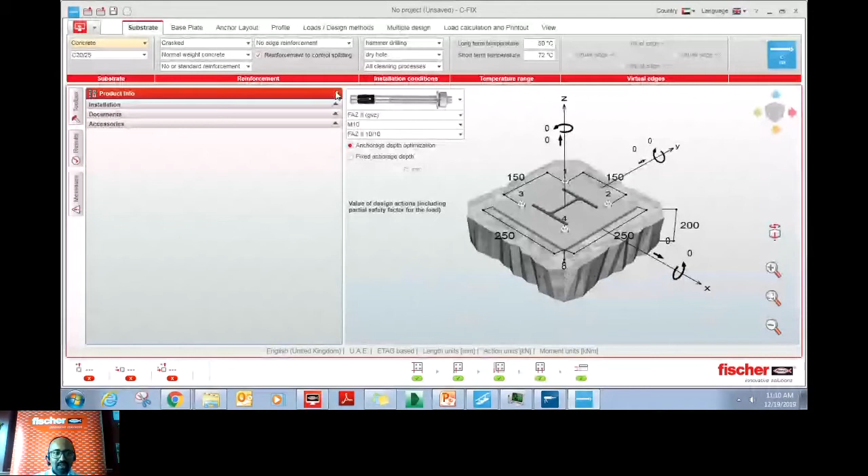The software as such is made so that you can finish your designs quickly, fast, and with less confusion. So the trick is you start from left, you end at the right side. You can see different tabs from the left side, top, which is substrate. The second tab is base plate, third is anchor layout, profile, loads, multiple design, load calculation, and printout.

So we start with substrate, fill all the information as you go, and end up at load calculation and printout where you would get your report. So let's now dive a little deep into each of these modules, each of these tabs.

The first thing, substrate, is the most important thing because this is where you want the anchor to be installed. Is it concrete? If it is concrete, is it cracked or non-cracked? Or is it masonry? If it is masonry, is it hollow block, solid block, AAC block? What is it? This defines where you are going to make your drill hole and fix your anchors. Let's say you have fixing in concrete.

If it is concrete, as we all know, there could be two conditions, cracked or non-cracked. Let me be a very conservative man, I would select cracked concrete. Then you have to define what is the compressive strength of concrete, or what is the grade of concrete.

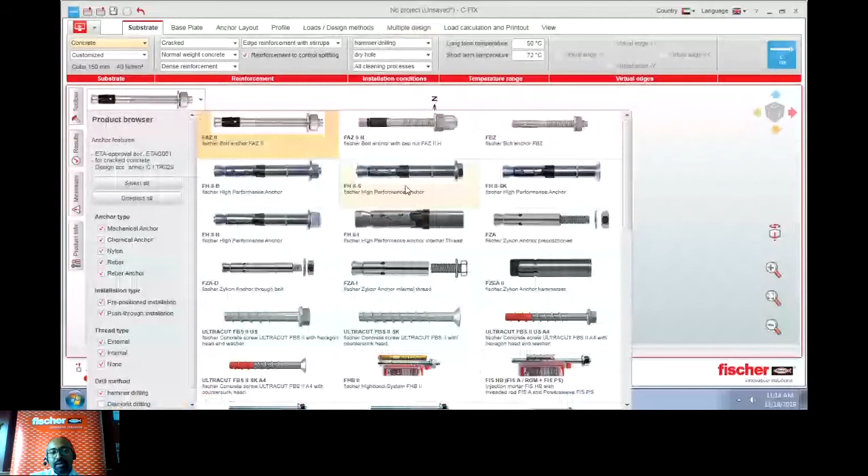The next thing, also an interesting topic, is you can select a dry hole, water saturated hole, or standing water in hole. Dry hole is when the hole is 100% dry. Water saturated concrete is when the concrete is wet, and standing water in the hole is where water is inside the hole itself.

The next option is to define the temperature of concrete. Always remember, this is not the ambient temperature, it is the substrate or service temperature of your concrete. In normal cases, if you have an ambient temperature of 30, the concrete tends to be hotter or warmer, so you always have to define your concrete temperature. Honestly, this does not affect mechanical or metal anchors much, but it affects chemical anchors a lot. So if you're an engineer designing chemical anchors, make sure you're using the appropriate temperature.

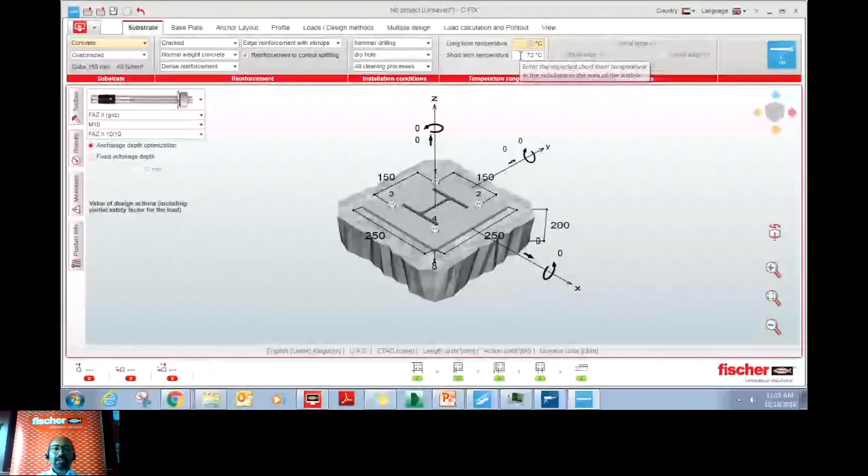To make your job easier, Fischer has selected the maximum temperature in the region, which is a long-term temperature of 50 and a short-term temperature of 72. So we have taken care of this part, but if you have higher temperatures, you'll need to consider this.

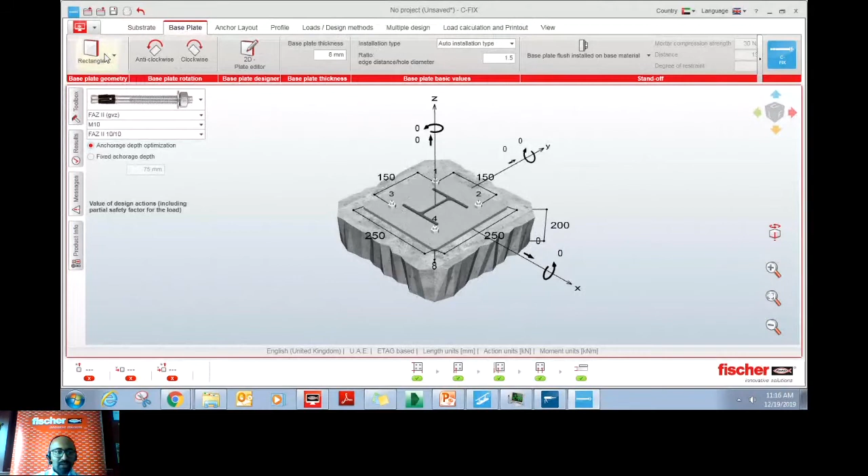Let's go to base plate. The base plate is basically the plate which you are connecting using the anchor to your concrete. For the base plate, you have the option of different shapes. You can even design a single anchor with no base plate.

You can have a circular base plate, an elliptical base plate, a triangle base plate, a rectangle base plate, which is always a common requirement, a hexagon, or a polygon. The polygon option lets you define your base plate in any abnormal shape, as you saw above. We'll come to that in a moment.

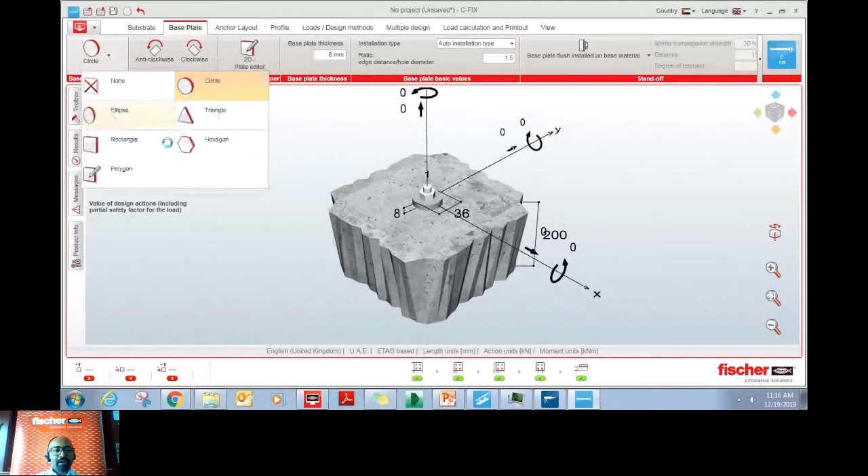Let's take, say, a rectangle base plate. Let me give it a dimension of 300 width and 400 breadth. You also have the option to rotate the base plate at 45-degree angles to match your requirement.

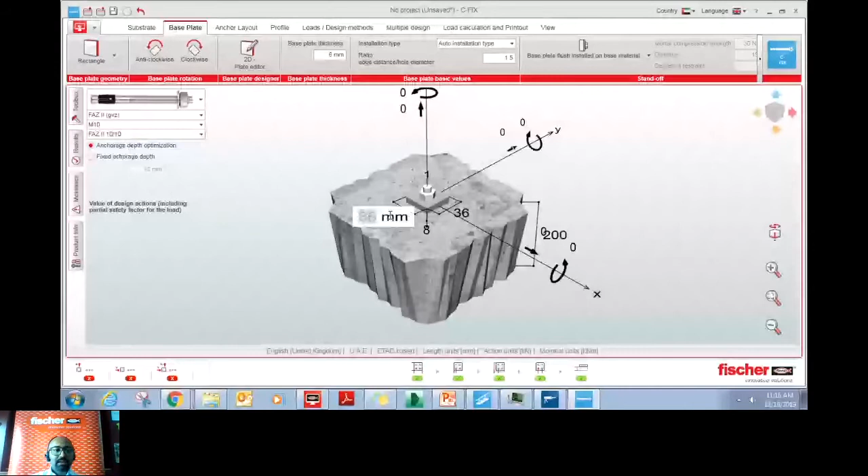Now the next portion is called the 2D plate editor. Once you click on 2D plate editor, this is the same option as the polygon we saw. This gives you the power to modify and customize the base plate to any special requirement you have. I can modify it and make it a triangle, or make it something like this, which is a very unique base plate.

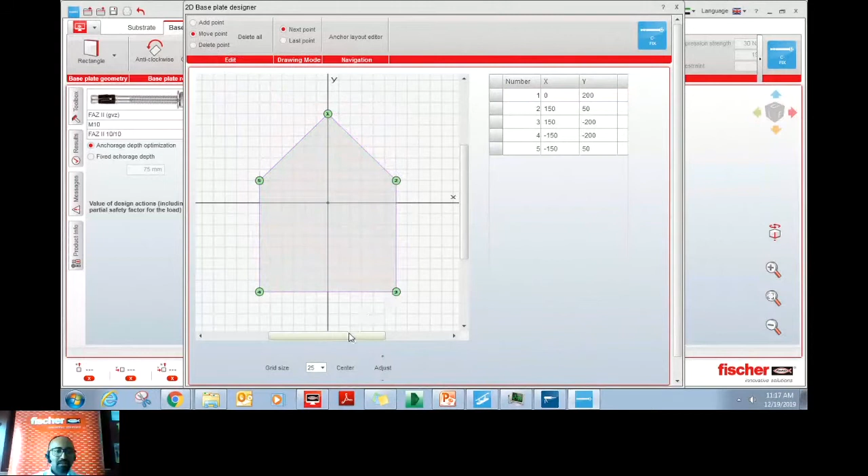This is basically like a toy. I really enjoy using this tool. You can really play with the software and design your base plate. You can make any random shape, you can be creative with this tool, and have a really flexible base plate designed according to your site requirement.

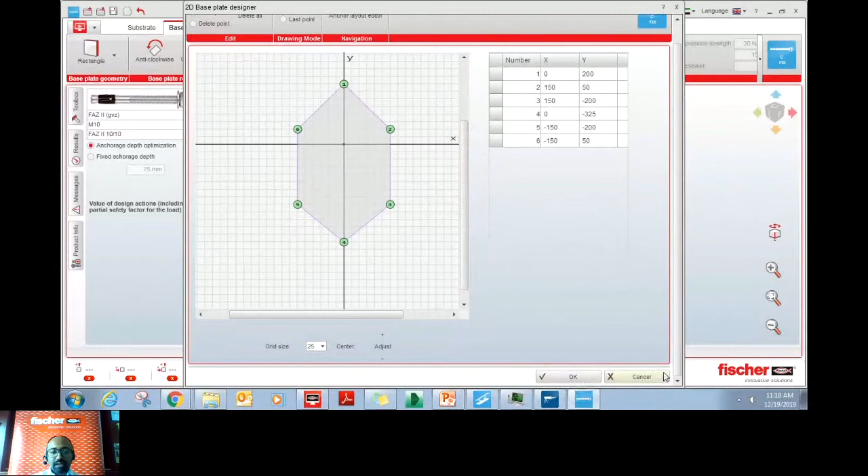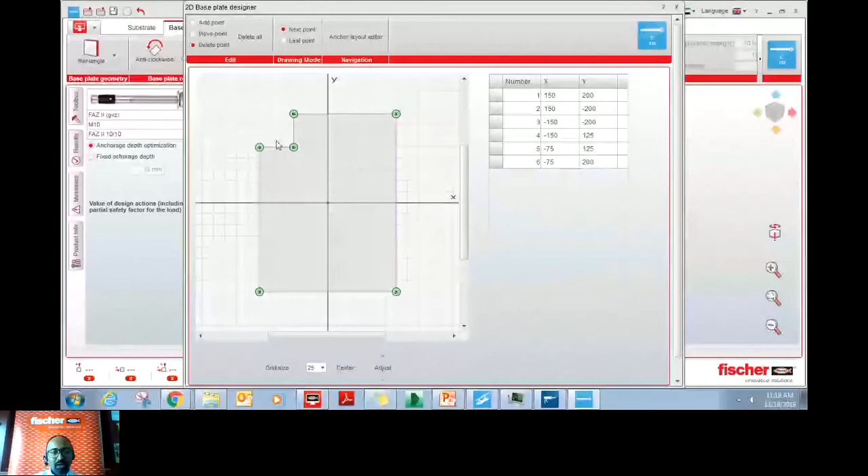In some cases, when you have a rectangle base plate and a concrete column coming at the corner, you might want to make a notch. This is a very useful tool for that too. You can create it the way you want, just like this. So if you have something clashing with your base plate and you can't have a plain rectangle base plate, you can design a notch in the software and have a more realistic base plate design.

Next is the base plate thickness, which is basically the thickness of the base plate. You have two options: either mention the thickness directly, or change it in the interface. I feel 8 mm is too little, so let me make it 10 mm. You can use either method, it's very easy.

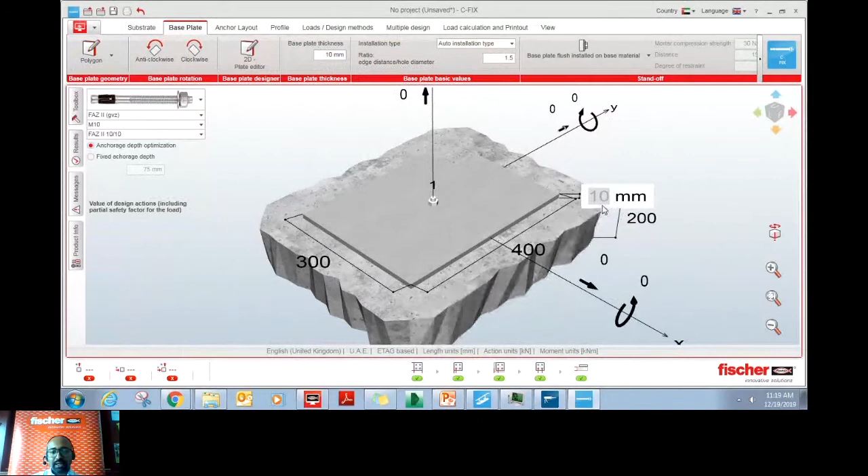Then you have an option here called auto installation, pre-installation or post-installation. To make it simple and to avoid any confusion, keep it auto installation so the software takes it as a more conservative thing.

The most important thing when you're designing a base plate is this value, called the standoff option. By default, the software assumes your base plate is connected straight to the concrete, with no gap between the plate and the concrete, which is not true in most cases.

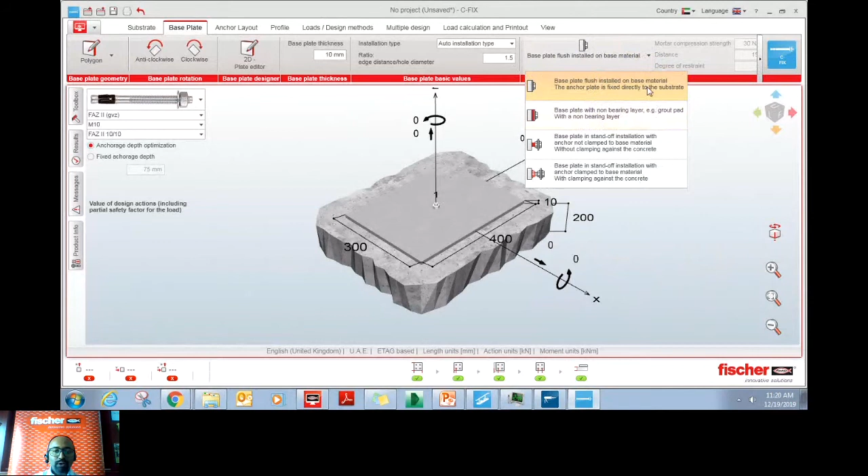So you have an option of standoff. If you have a grout, a non-shrink grout between the base plate and the concrete, you can use this option to add a layer of grout, let's say 25mm. Now, as you can see, there is a grout of 25mm between the plate and the concrete.

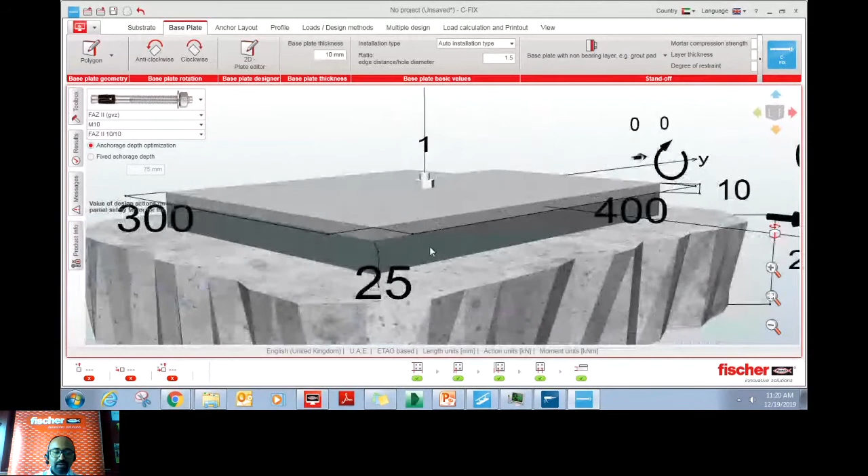This is very critical in design, and if ignored, your anchor might start bending because it is experiencing high bending moment. It makes a difference only when you have shear force. For tension, it might not affect the anchor capacity, but for shear loads, it affects a lot.

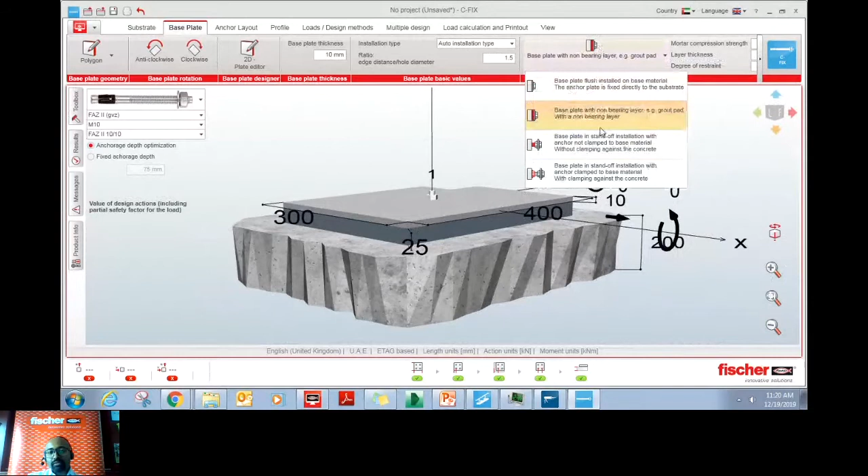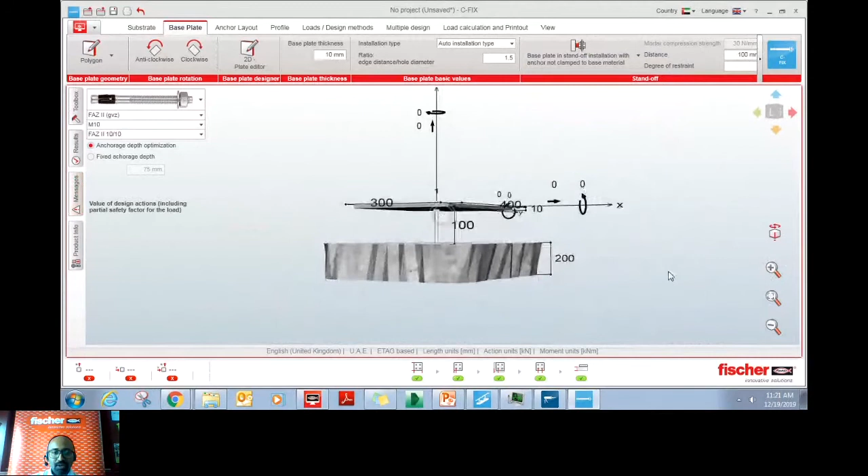In standoff, we have a few other options. For example, if you don't have a grout in between, you have an option to make a standoff like this. Let me make it a little bigger so you can have a better view. So this is a standoff with nothing in between, it is pure standoff.

As you can see in any lamp post fixed in Sheikh Zayed Road, next time when you pass Sheikh Zayed Road just have a look at the lamp post, you would see a standoff like this.

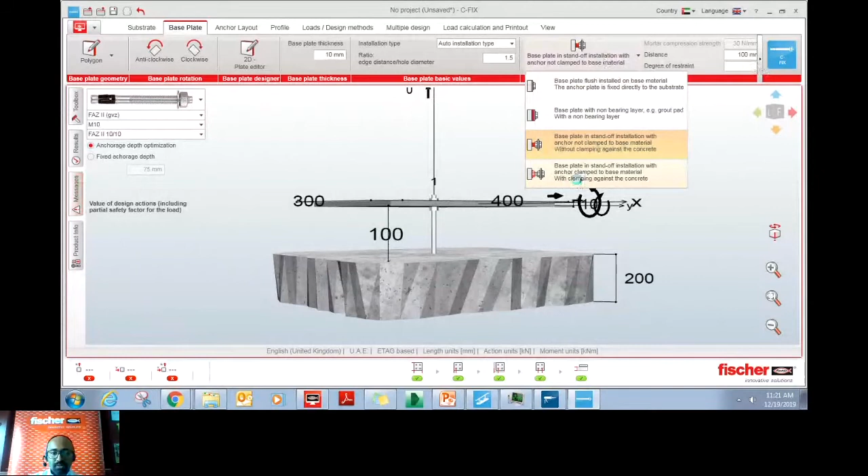Or we can have a standoff with 3 nuts, 1, 2, and 3. So you have different options - a grout layer, no standoff, or just pure air in between, with nothing filled in the gap. This is one of those options.

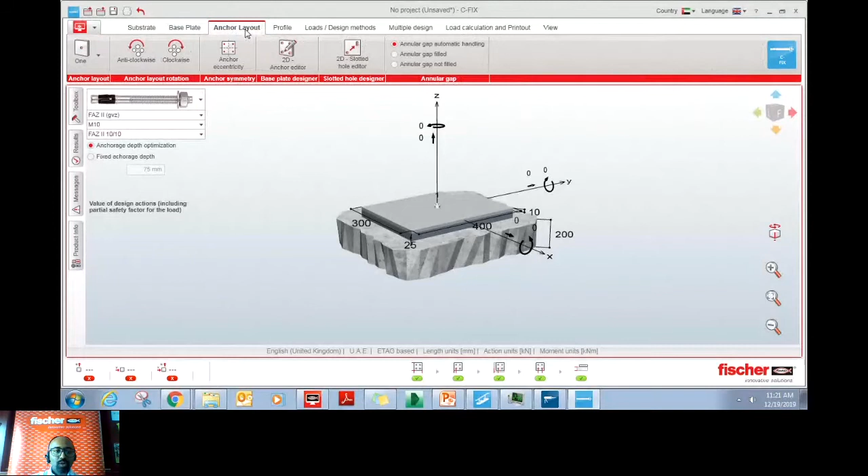And then you go to anchor layout. In anchor layout, it lets you choose the way your anchors are arranged in the base plate. First, if you go to the left side, you would see an option to select the design of anchors, the layout of anchors.

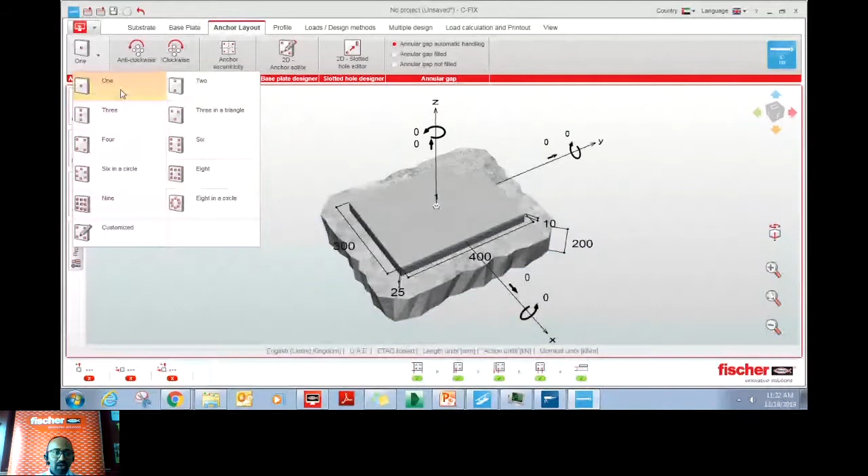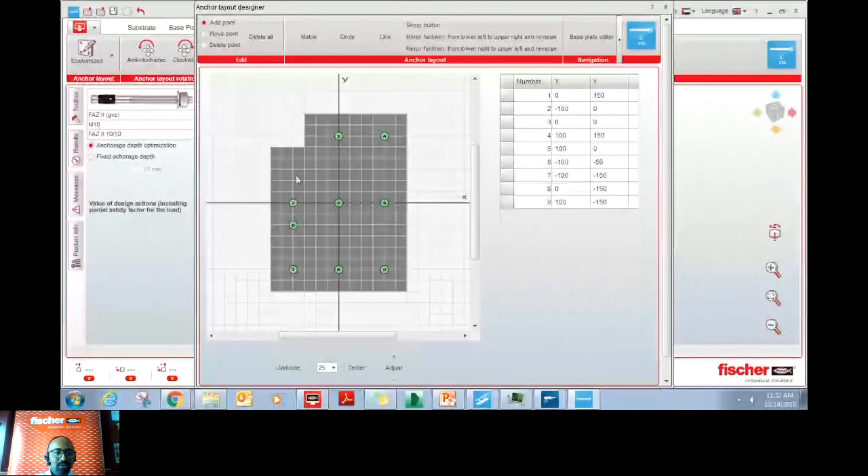You can have a minimum of 1, of course, and a maximum defined by the software of 9. Even if you have more, you have an option called customized. If you go to customize, you can add anchors in any number and any location - the software does not limit you to 9. You can go to even 10, 12, 20, up to you.

So you have a tool where you can add all these values. If you have a very complicated design with probably 12 anchors, and you've made an AutoCAD sketch, you can directly add the coordinates on this screen and it automatically gets saved.

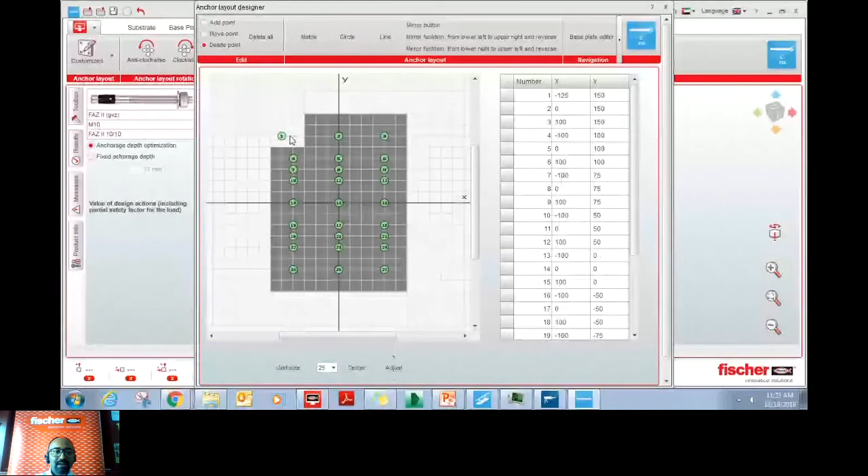Or we have an option called mirror, where to save some time, you can click the mirror button and both sides would have a duplicate. So you have to basically do only one side and then it would be duplicated to the other side. Okay, that's how it is.

To make the design a little simpler, let me go with a standard arrangement of 4 anchors with a spacing of 300. Actually, 300 would be too much - let's go with 200 by 200. Okay.

Now you have the 2D plate editor, which we already saw. There is an option called slotted hole editor. If you are designing with a base plate having slotted holes, you can definitely choose the slots.

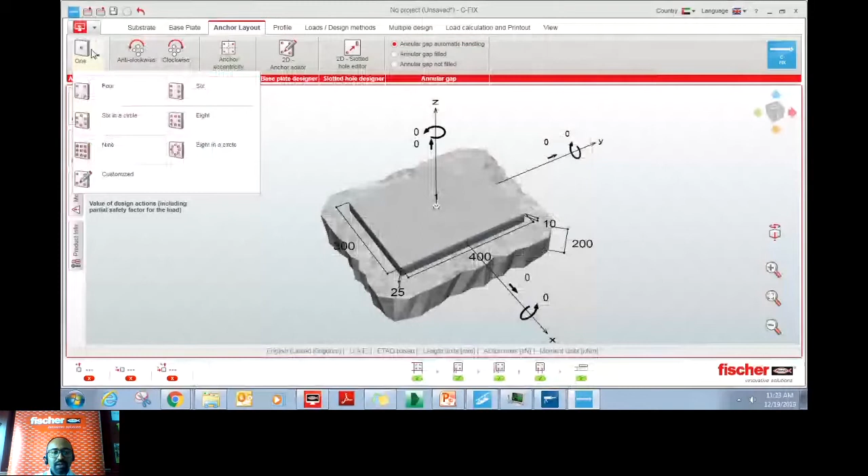You can have slots either on 2 holes or 4 holes, up to you. So you can design something like this, and the software will calculate accordingly. In the event of a slotted hole, basically the anchors at the slotted hole would be released in shear direction parallel to the slots - this is what happens.

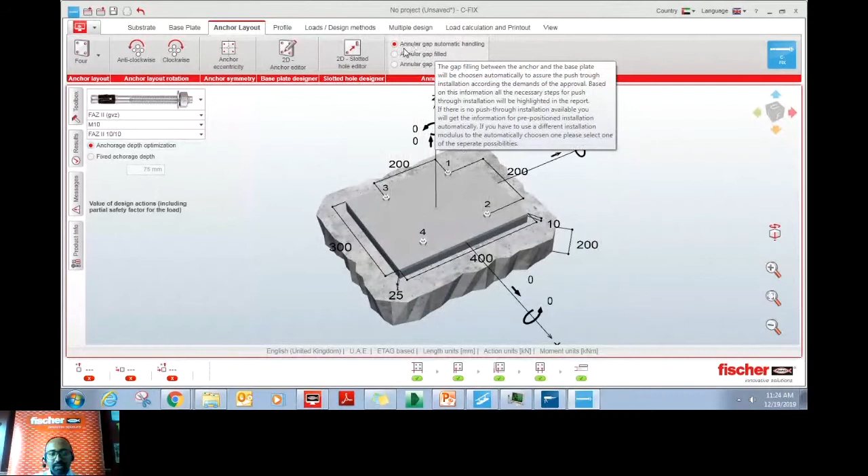Then you have an option for annular gap handling. By default, it is automatic, or you can select annular gap filled. When you select annular gap filled, if you notice the anchor, you can see an orange ring around it. Basically what it says is the gap between the anchor and the base plate should be 100% filled with a non-shrink mortar - it could be an epoxy based chemical or any non-shrink mortar available.

You can use it, but sometimes you don't prefer this method, so you can tell the software you don't want this option at all by clicking annular gap not filled - so in any circumstances, you won't have annular gap filled. But if you want the software to advise whether it's necessary or not, go for automatic handling and the software does the job for you.

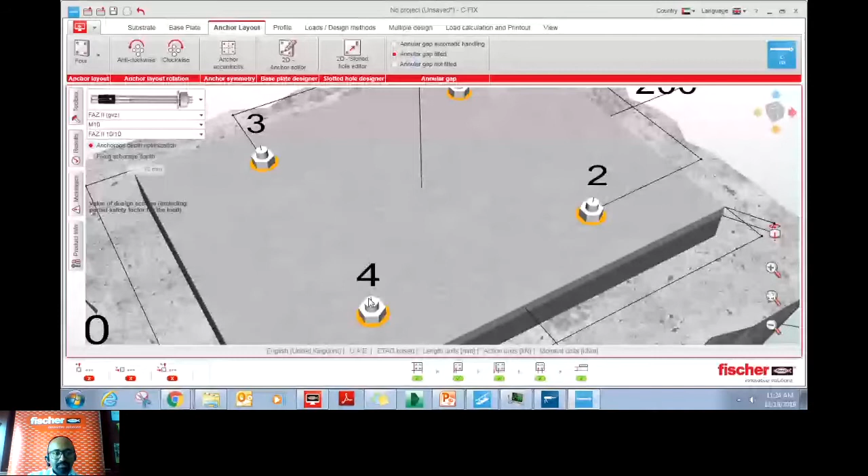Let's go to profile. Profile lets you define what is the profile which is transferring the load to the base plate. As you can see, most of the European sizes are mentioned here, like I profiles, H profiles, and so on. Even L angles, T sections, Z profiles, square, circle, most of them are available. But if you have a shape or a dimension which is not part of this, there is still an option here called customize.

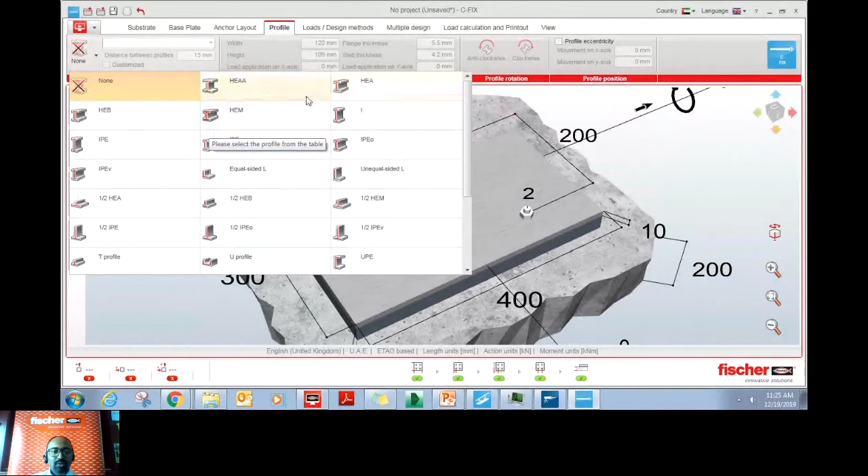Let's say in this case I want a profile which is 100 by 200. I can do that, with a flange thickness of 6 mm and a web thickness of 4 mm. Just from my mind, for an example, you can define that and the software would draw it for you. And you also have an option to rotate the profile in 45-degree angles. In any direction you can rotate it.

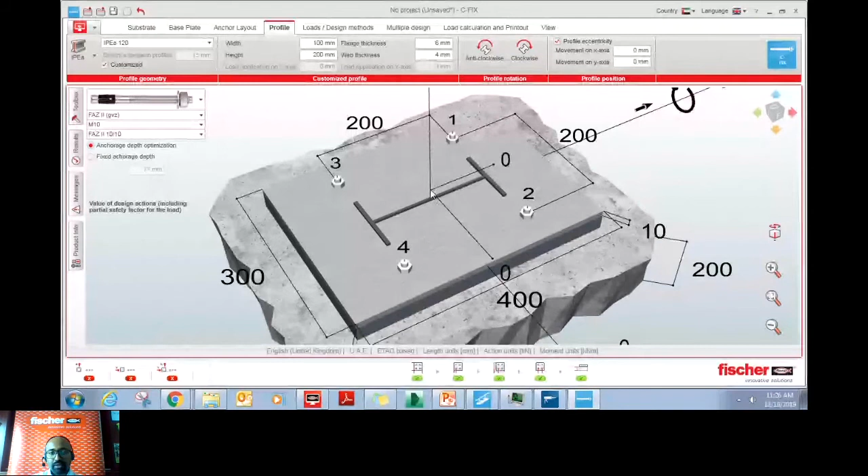Also, we have an option called profile eccentricity. If you want to move the profile away from the center of the base plate, you can do it in X or Y axis. So you can have 50 mm in X, 50 mm in Y. You would have a profile eccentricity, something like this. You also have an option in anchor layout called anchor eccentricity, wherein you can change the symmetry of the anchor. You can make it asymmetric by moving the anchor away from the axis. You can customize it and modify it to match your requirement.

So now we are at profile. The next thing is the most important thing, which is loads. In loads or design methods, the first option is to define the design method you prefer for anchor calculation. The first method is called ETAG. ETAG is the European Technical Approval Guideline, which is the oldest and the most popular code for design of anchors.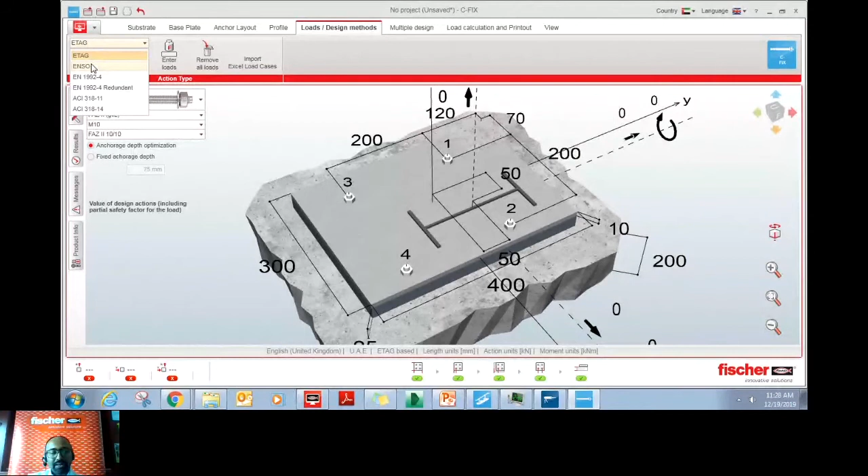The second option is called ENSO. ENSO is an engineering solution developed by Fischer based on the state-of-the-art fib Bulletin 58, which makes your anchor design even better. It takes it to the next level by designing more number of anchors, more flexibility, and so on. And then the latest code, which got released almost end of last year or beginning of this year, is Eurocode 1992 Part 4, which is also available.

And then you have a code for redundant fixings, where you are fixing non-structural applications with sharing of loads, like your pipe applications or cable trays. You also have American code ACI 318 part 11 and ACI 318 part 14 if you wish to design as per American codes. So all the options are available in the software. Let's stick to ETAG, which is the most popular code.

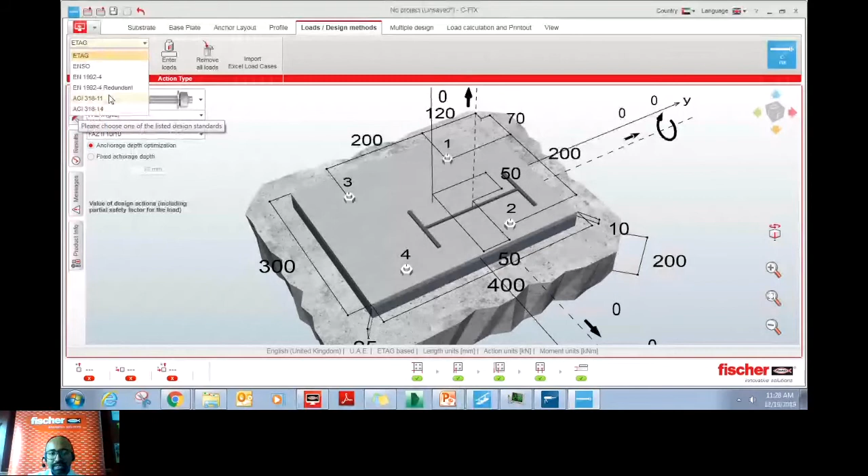And then design actions. By default, the software lets you calculate anchors with loads. Whatever load you tell it, the software assumes by default they all include a load safety factor. Let's take an example. If you want to have a tension of 10 kilonewton, which is an actual load, you multiply it with a load safety factor of 1.5 and put 15. So the software takes it as a design load. It assumes that you have included a load safety factor.

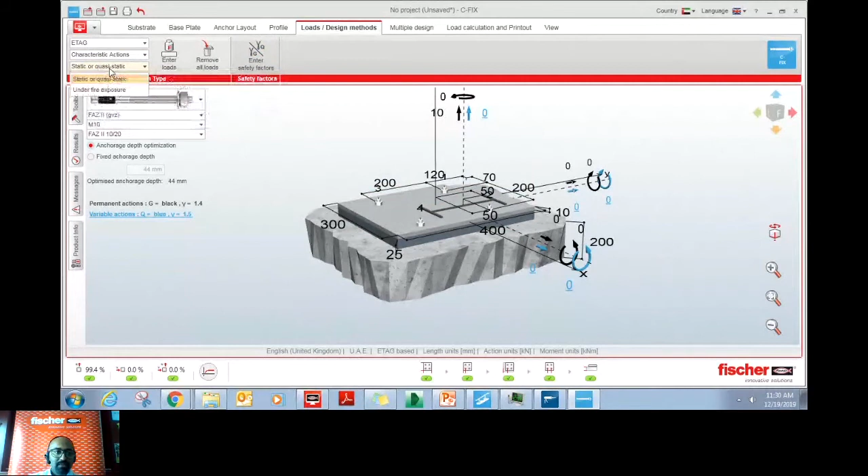But you also have an option for characteristic actions, wherein you can tell the software the real load, the working load, and you can modify the safety factor you want. For example, I want 1.4 for dead load. So the software automatically applies the safety factor, and then the job is done. Let me go back to design actions. Yes.

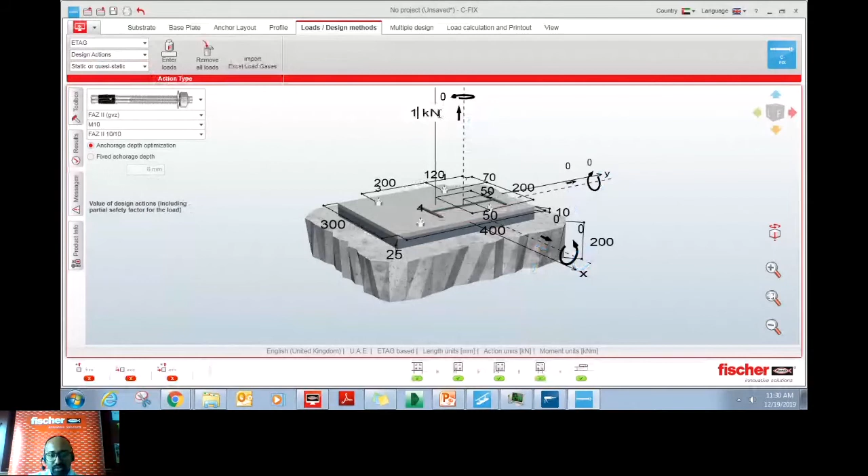Now the software is capable of doing a static design, fire design, seismic design, alternating design, or pulsating design, which is mainly dynamic loads. You can enter the loads manually, directly on the diagram, or you have an option to add loads one by one, or you can import Excel load cases. If you have a load case, you can directly import it using this tool.

So there is an Excel file. We can share the template with you also. You click on this, select your Excel file with the load format, and all your loads, you can have multiple load combinations, and all of it would be loaded directly. Now to proceed, let me check. Yeah,

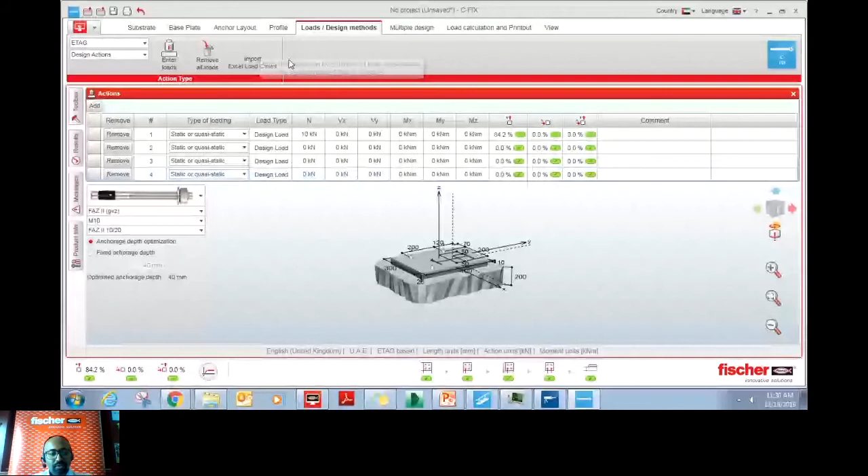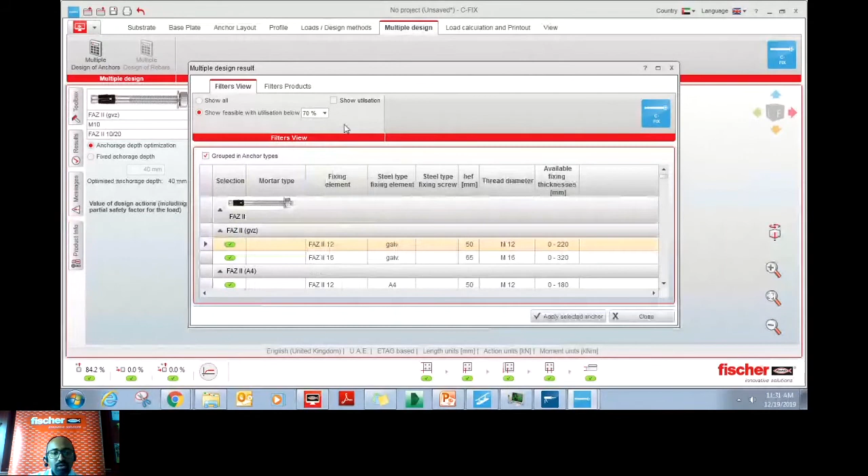multiple design. Multiple design is a tool if you want to see all the possible anchors working for the given criteria. So you can see these are the anchors passing the criteria, and you have a filter here also. If you want to see all anchors below 70% utilization, you can also do that here. You can filter the utilization and the anchors less than 70% would appear.

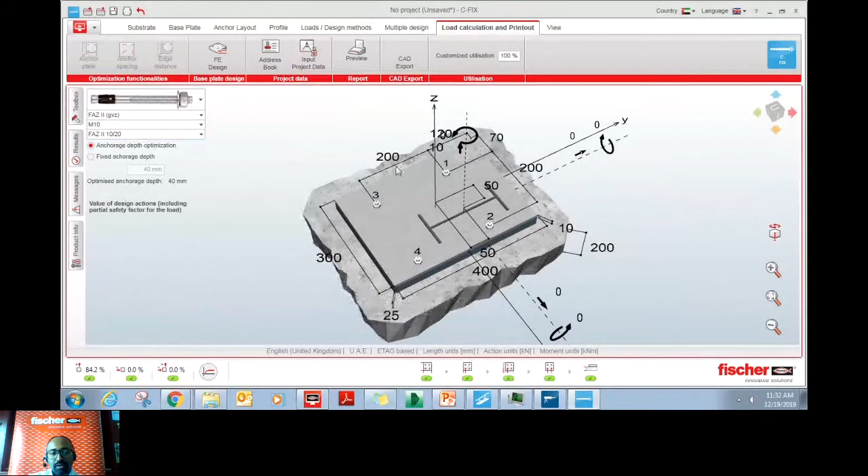And then the last option is load calculation and printout. Now, I forgot to mention a point. If you have edges, for example, this plate is connected on a concrete column 500 by 500. So your concrete thickness is 500 and you would have an edge distance of 150 both sides, because the total should be 500 on this side as well. Okay, so now you are fixing on a concrete column 500 thick and your total dimension is 500. So this is how you define the edge.

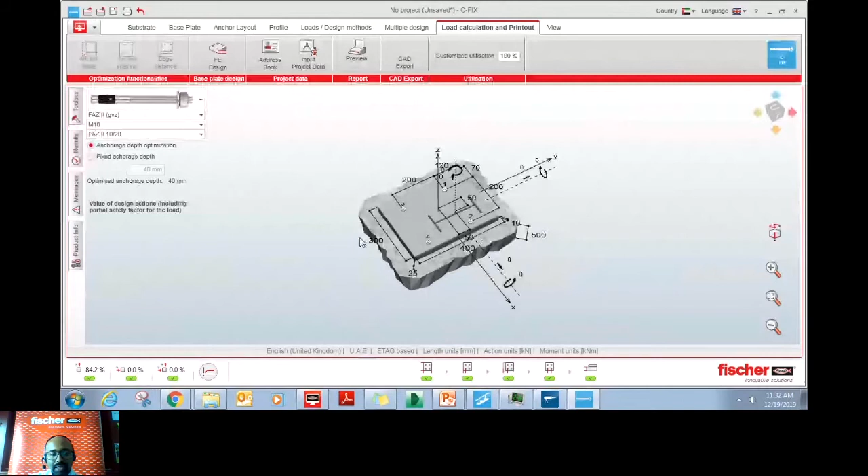And then you go here. There is a tool called FE design. It is finite element design. So the software is built in with a finite element module where you can choose your plate raw material, the steel grade. Let's take it as S275. You can tell the software to calculate the minimum thickness and it tells you, see, you require only 8 for your loads and your profile. So click on that, you would have 8 directly part of the software. You also have options to enter your address, your project details, etc.

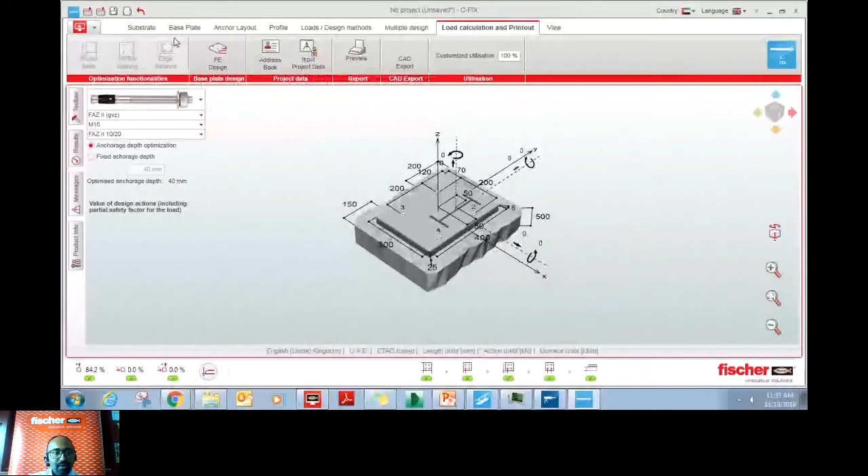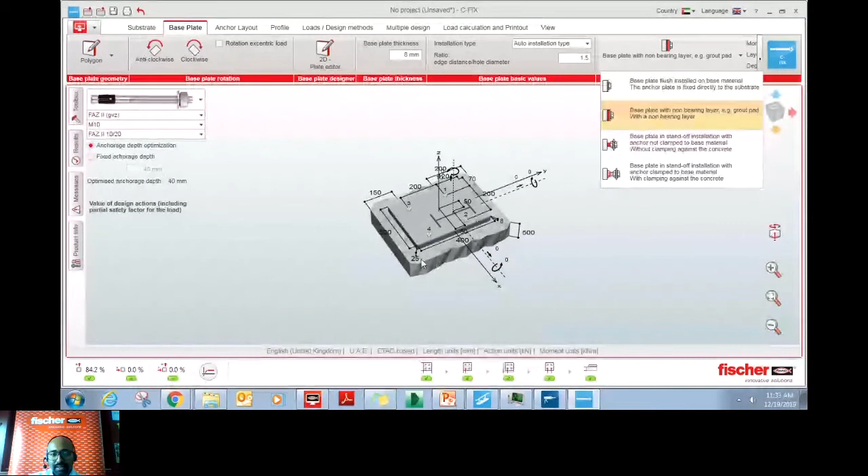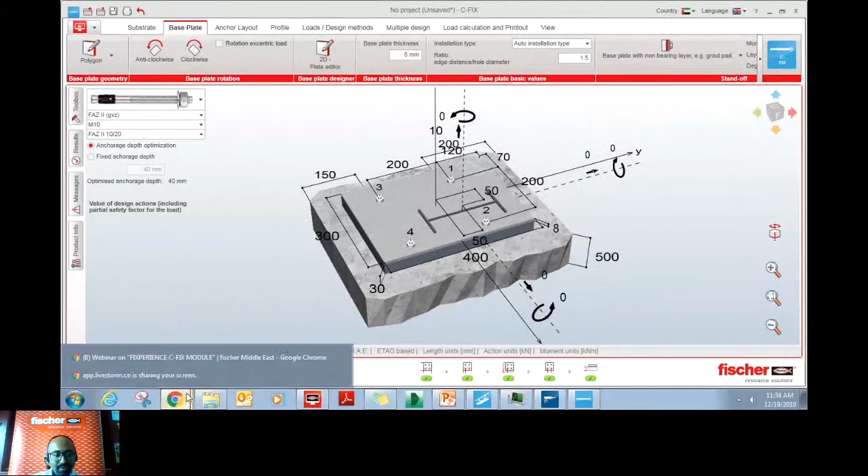Now, let me ask you a question. We discussed here that we have an option where you can define a standoff fixing. Let's say we have a standoff fixing of 30. Okay, why do you think it is very important to define this in the software rather than leaving it in this option? What would happen if you design the calculation using this option, but inside you have this option? What do you think would go wrong? Any idea? What might happen if you don't consider standoff installation of anchors while you design?

Okay, I can give you two options. Okay, you are a little correct, Mr. Amir, but something more specific I'm looking for. You have two options. It'll affect anchor length, it will differ, of course, but also, thank you, Mr. Andrew, for participating. But also, what do you think from a structural point of view? What might happen in the anchor capacity?

Okay, yes, both of you are almost correct, Hudson and Nasruddin. It'll affect the moment capacity of the steel of the anchor. Irene is also correct. Amir is also correct. You would have reduced capacity, but it is only reduced capacity in shear because you have more bending moment on the steel. So the lever arm, yes, the lever arm is more. So you would have bending on the anchor, which is additional stress on the anchors.

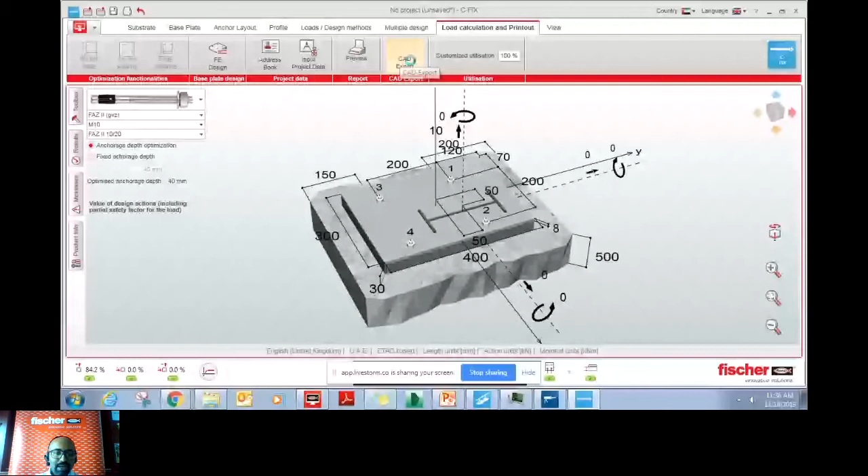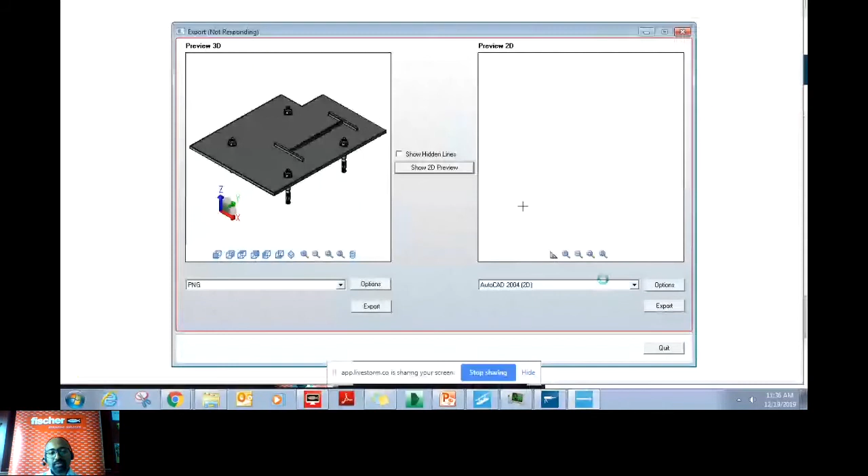So now let's go back to the last part, which is preview. Before preview, I would also like to show you something else. There's an option called CAD export. If you click on CAD export, the software is connecting to Fischer's server, and it'll generate a model of your case in 3D or 2D. So you can have different views available. You can also shift it or flip it to 2D, and then you can download it directly. So this is a very innovative feature of what we have developed. So it's easier for your design team, or you can transfer your designs to your design team. They can easily copy the AutoCAD drawing and paste it in their drawings.

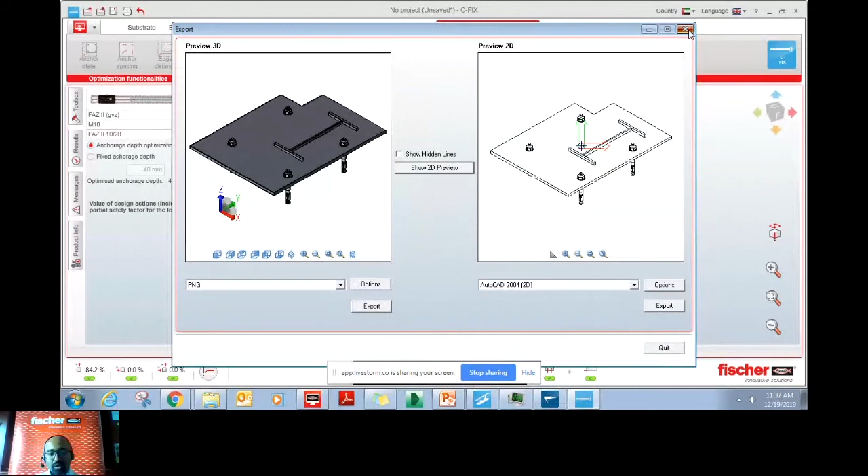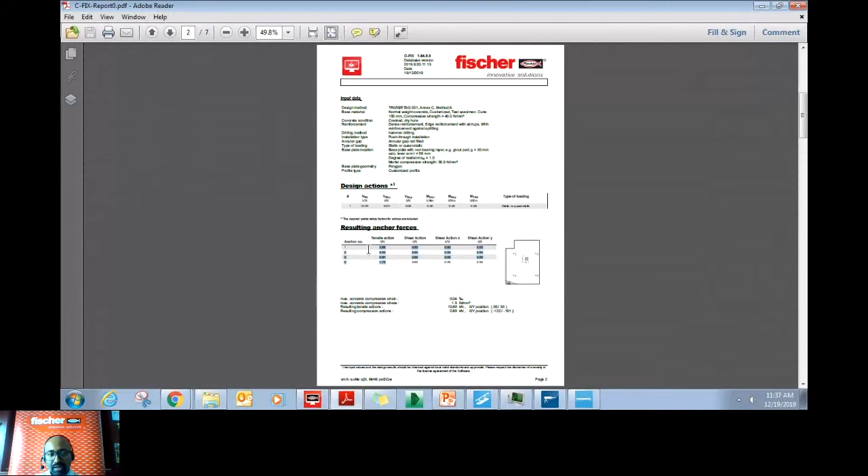Let's go to preview. In preview, you have to select show PDF. This is how the software output looks like. You would see the anchor bolt selected, the embedment depth, the code which is used, the approval, and so on. And this is what we have done in the software. And then these are the details, like what is the concrete grade, what is the compressive strength, and so on. And then you have options for your loads, which are entered, what is the reaction on each anchor, and then it is doing the check for tension load. For example, here in this case you have steel, pull-out and concrete checks.

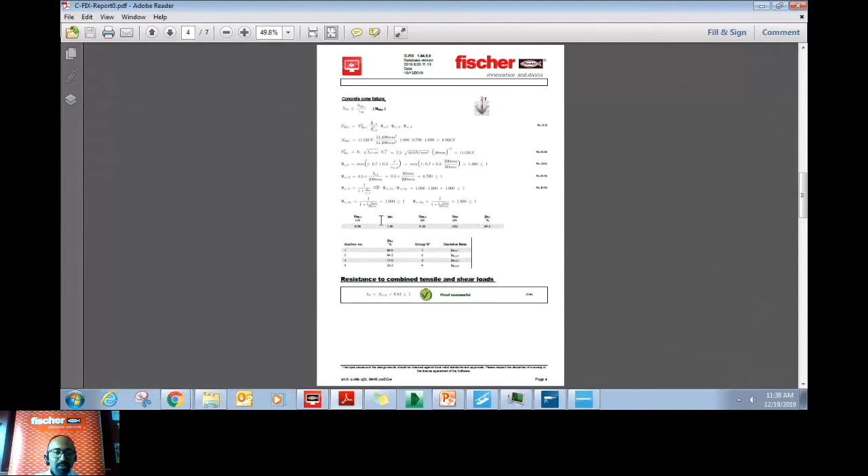The beauty about the software is you can even learn from the software. It is showing all the checks in formulas, not just in tables and numbers, so you can easily verify how the software is working, so you can have a better idea. And last but not least, you would also have the base plate check, which is attached to the calculation, so you can directly use this tool to calculate your base plate thickness, which makes your job much easier.

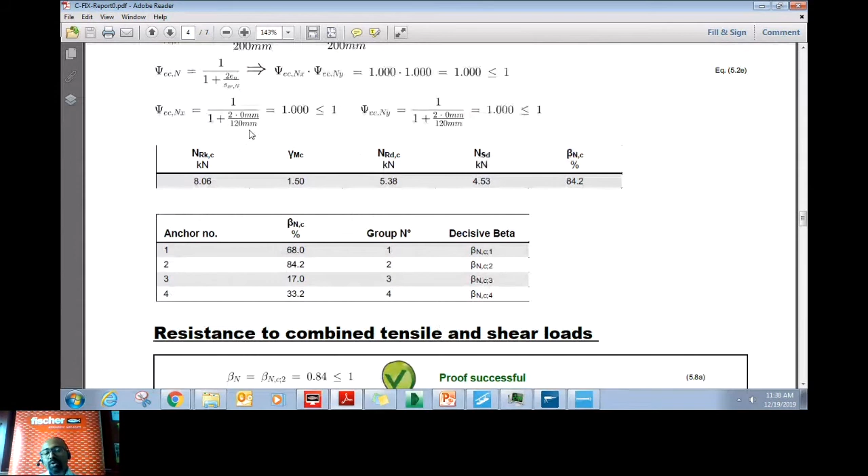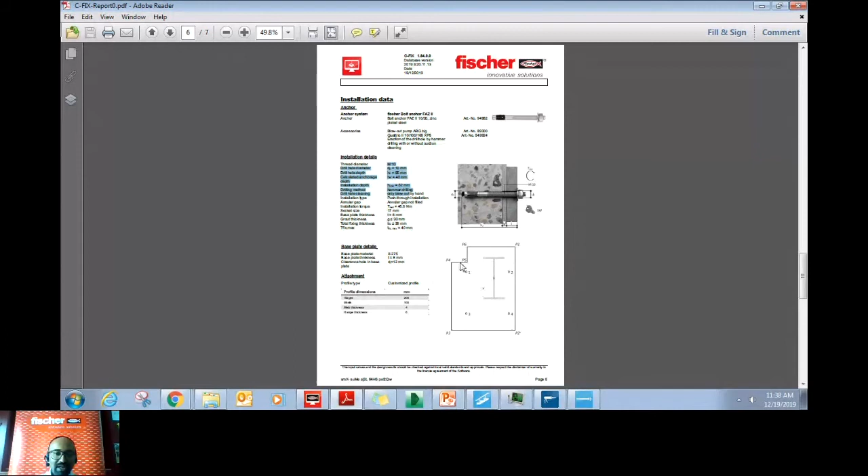And then the last page would be about installation data, where you will see what is the model number of the product selected, what accessories you would require for installing this product, what are the drill hole diameters, what is the torque to be tightened. If it is chemical, you would also see the volume of chemical, and so on. And then on the same page you would have base plate dimensions, so you would have coordinates of your profile and your base plate, which is very easy if you want to give it to a CNC machine for operation. That's it from the software, more or less.

I would also quickly jump to the next software, which is Railfix. Railfix is a software mainly designed for handrail connections. It is linked to CFix, so the calculations more or less would be done by CFix, but you can model your handrail case here. For example, let me quickly design a case. Example, I have a parapet mounted handrail. It is external application and it is connected to the concrete slab.

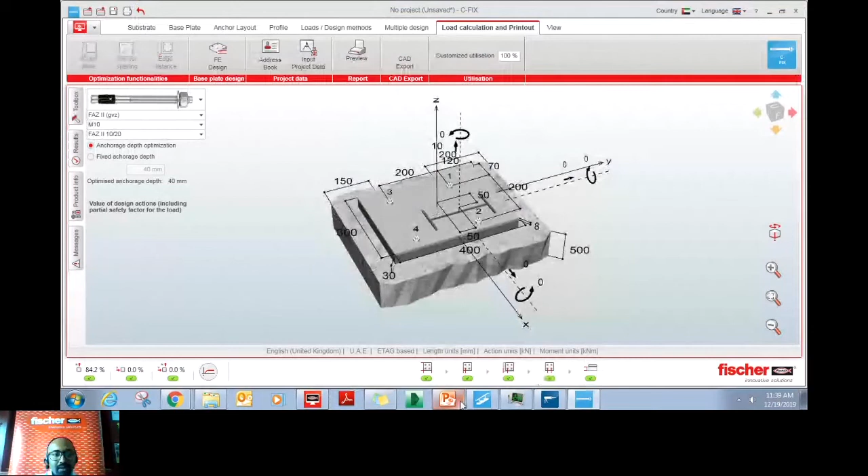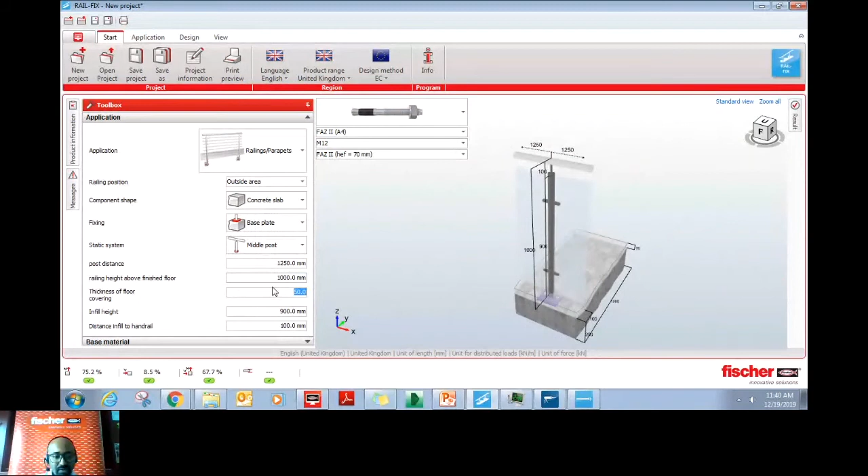How is it connected to the concrete slab? Let me say it is on top. It is top mounted handrail. And how do you define the system? You want to define it as single post, multiple post, two post, whatever. Let me take it for single post. The post distance, what is the spacing between two posts, and what is the height from the finished floor height, thickness of finishing, infill height, and distance to the handrail, which is this distance.

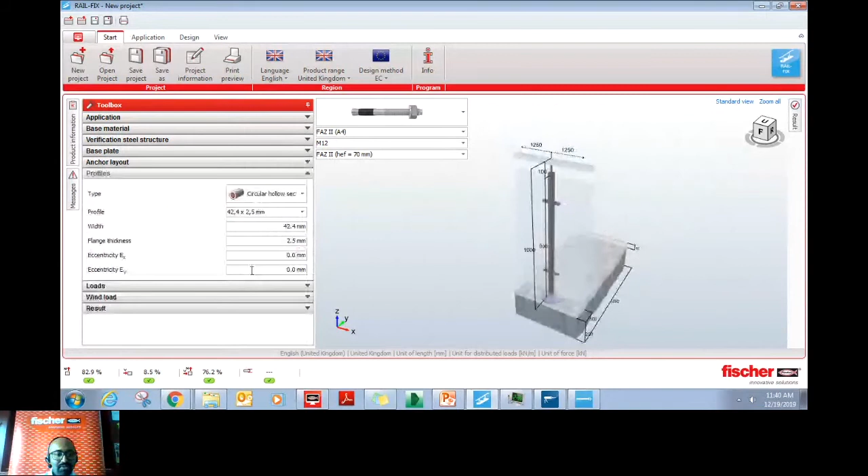Base material, what is your concrete, what is your base plate, how much is your dimension. You can even have circular base plate. Anchor layout, how many anchors are there. Let's select 2 anchors for the time being. Loads, you also have an option here. You can select inward and outward forces. You can select vertical and horizontal forces.

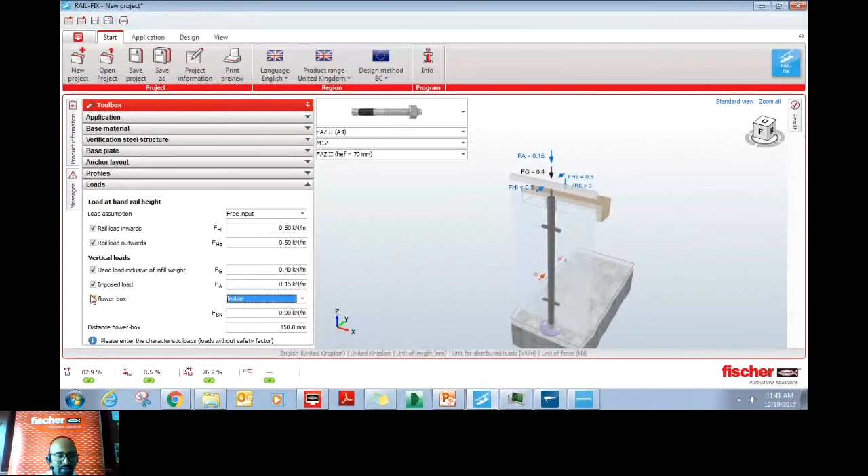You can even add a flower box, if you want to add additional weight of a flower box, you can also do that. And then the software would also calculate based on wind pressure. If you have a wind pressure outside of 1 kilonewton per meter square or 1 kPa, you can do that. You can also select height of the building. So all of this are possible, and then the software would do a design for you. Okay, let me go to the printout and show you something interesting. Once you model all this in the handrail software, it would also help you design your rails.

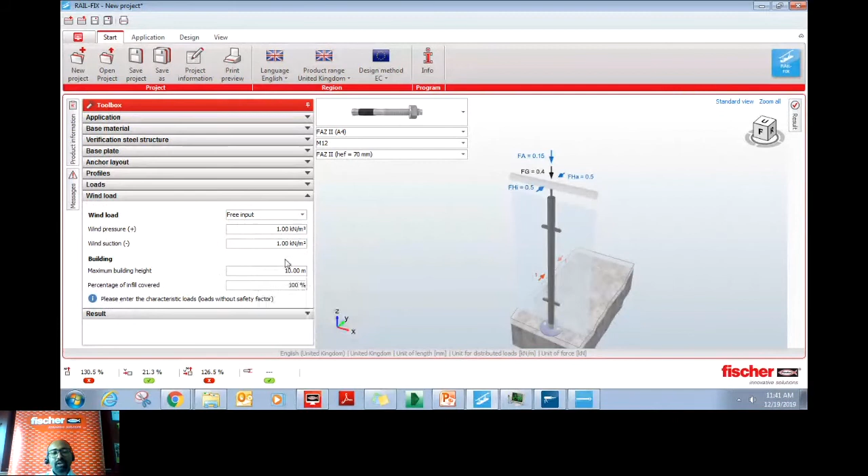Sorry, I closed it by mistake. Okay, now this is the software. This is the input, what we have done, the load values, and so on. And then this is the reaction coming on the anchor. This is the anchor which is selected. This is proof of anchor, shear load, edge distance, and so on. So it's very easy using this software.

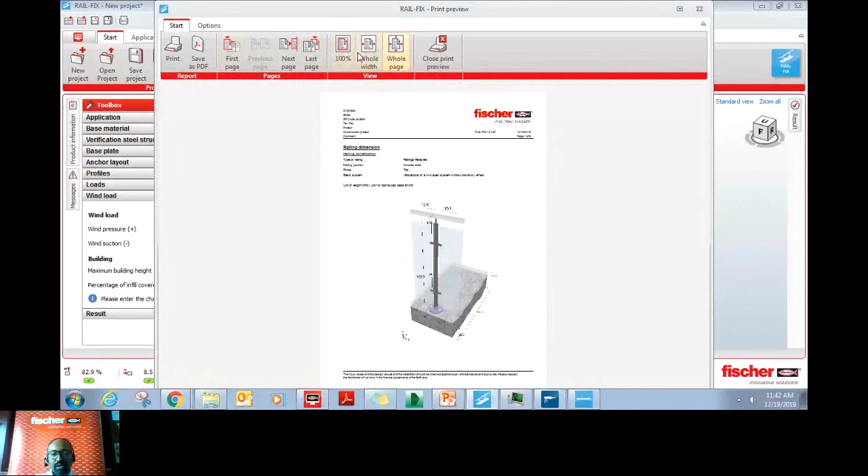You can define, you can also change the code if you wish to, and you can easily design your handrails. What do I say? It is more interactive. You can directly see what is the point of loading, and the software calculates this loading directly to the base plate, and it will calculate the influence on the anchors, which is pretty quick.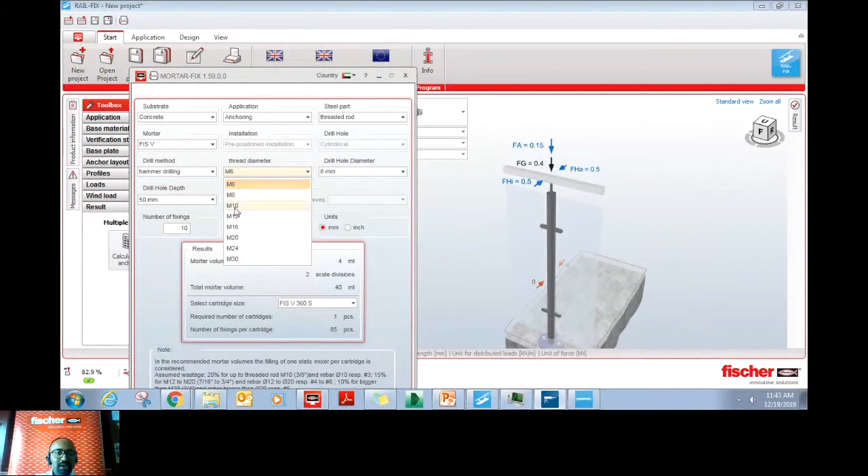The last software I would like to show you is a simple software. Imagine you are installing 10,000 chemical anchors. You don't know how many bottles of chemical are required. So let's say you are installing M10 and the embedment depth of the chemical is 200 mm and you have 10,000 holes. So you have an option to include wastage. So let's include wastage because for sure there will be wastage at site. So the software is calculating.

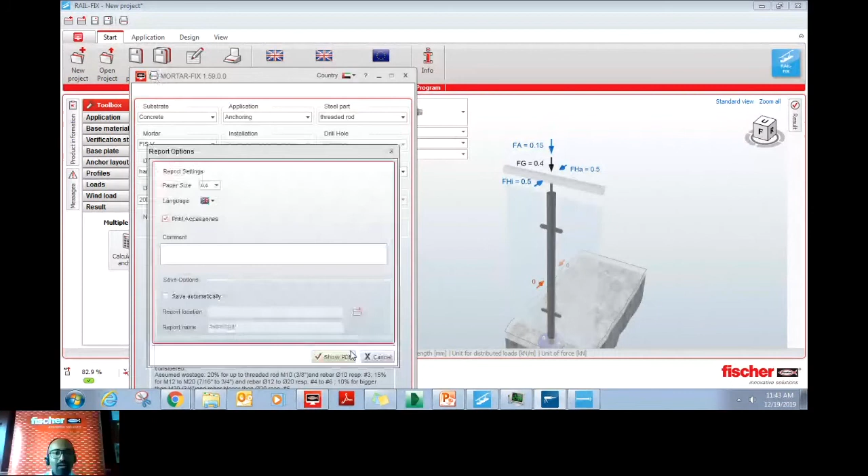For sure you need to select which chemical from Fischer you are buying. Let's say you are using FIS V product. So the software will tell you to complete this project, you would need 412 pieces. After you finish your design, you can take a printout. You can send it to your procurement team as a proof of how you ended up at 412 pieces. And then they can directly place an order to Fischer based on the selected product with complete article number and description. If you wish to buy accessories, the accessories would also be mentioned here. So this is a very easy tool if you want to calculate the volume required in a project for chemical anchors.

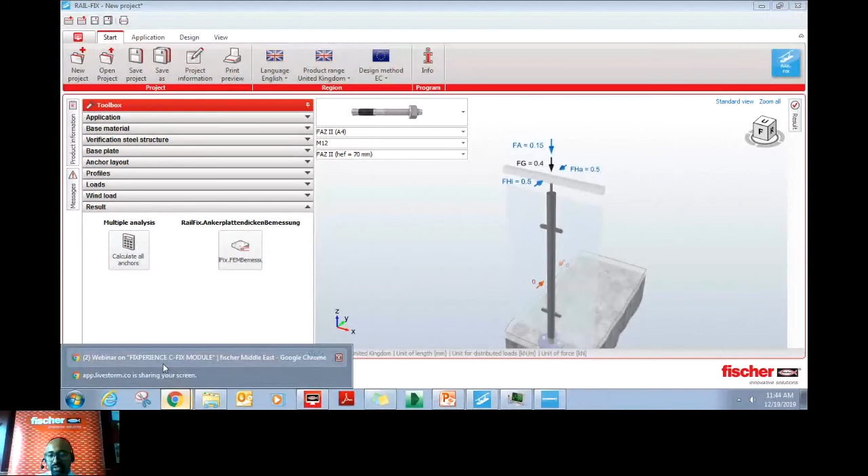That was my short presentation and introduction about fischer FIXPERIENCE. Now, since we are almost done, let us go back to the questions you have posted. Yeah, Mr. Ramkumar is the only person I see with a question.

Is there any option to verify the effect due to the shear key pocket in concrete? Okay. Ramkumar, this is a very special requirement. It is not part of the anchor code, but it could be verified manually outside the software. The software does not calculate it because the software is based on the European Technical Approval Guideline, wherein there is no option to consider shear key pockets, but shear key pockets definitely improve the condition for anchors, which we can do.

How about connection design in Fischer? Mr. Hassan, what exactly is a connection design? Is it steel to concrete connection?

Okay, no problem. Since we are not getting a response for this, did he respond? Okay.